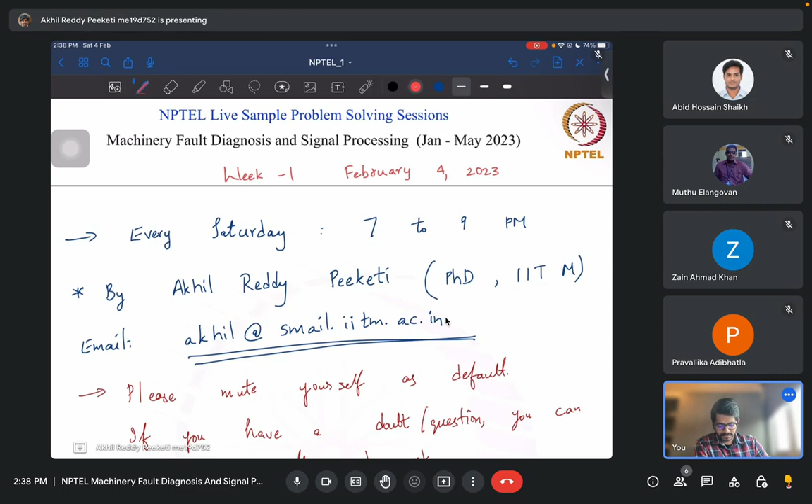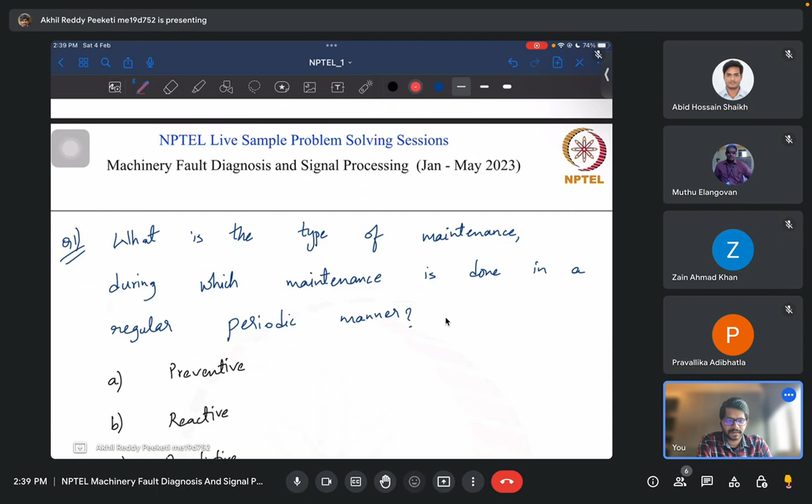Okay. So we'll be doing for the first week sample problems similar to your first week's assignments. These are not exact questions, and we won't be looking at the exact questions from your assignments. You have to solve them on your own. But we'll be looking at similar problems so that this will help you address the questions in your assignments.

So the way I do these sessions is I have these questions ready, some n number of questions, and we will look at each question and try to answer them and figure out the reasons why that is the answer and others are not, so that we can discuss the surrounding topics also. Okay.

So to begin with our first question, what is the type of maintenance during which maintenance is done in a regular periodic manner? Can anyone answer? Yes. Okay. The answer is correct. And why not others? And what kind of maintenance do you do in the other two types, reactive and predictive?

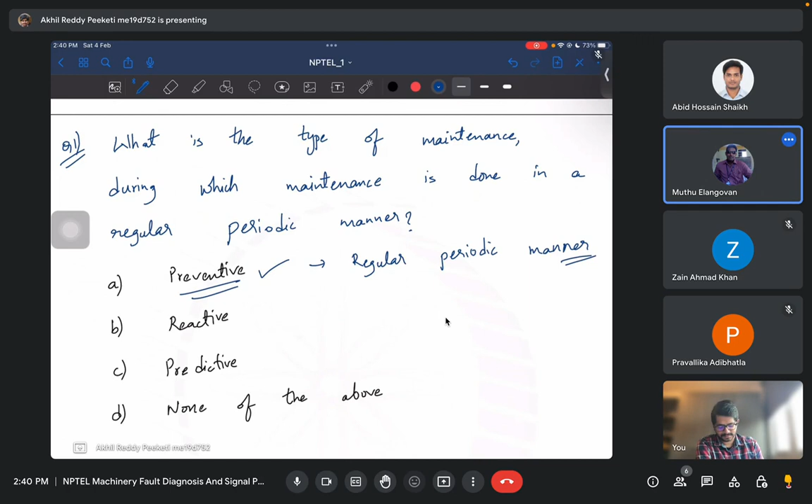Okay. And then the reactive, Muthu, can you speak? Abid, yeah. Muthu, can you? Yes. Do the maintenance. Yes, yeah.

So once a breakdown or failure happens, then we do the maintenance. So that is the reactive maintenance. And in predictive, we monitor the system, and if certain conditions are met, then we do the maintenance, right? Yeah. Okay, that's good.

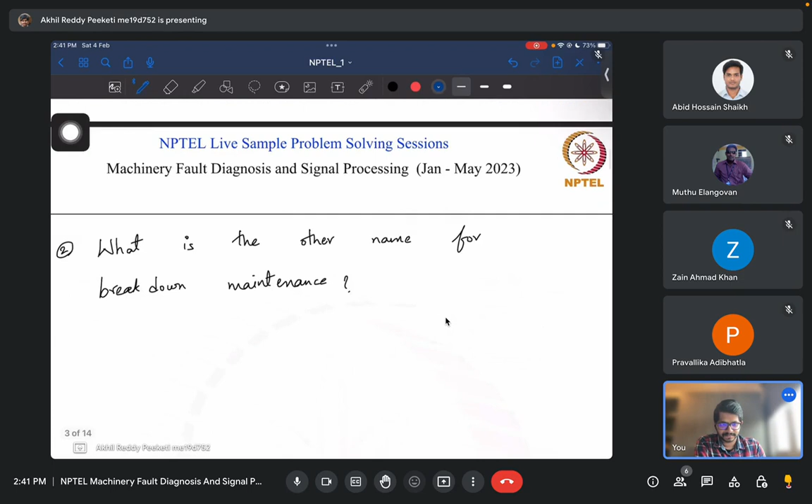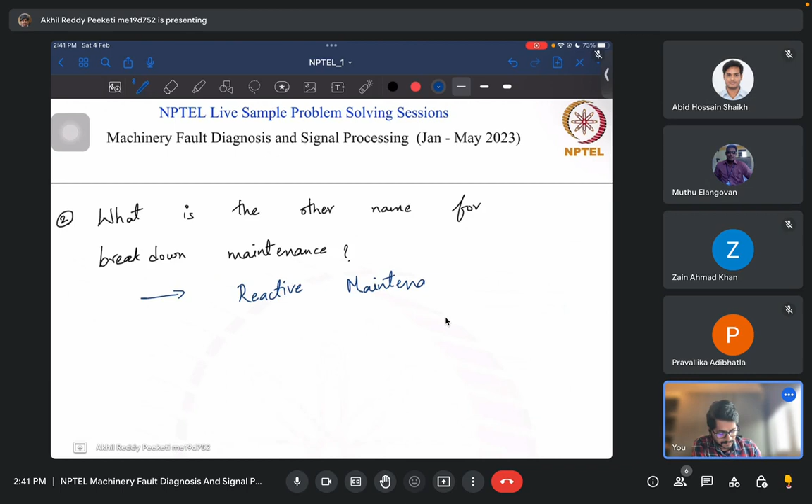So the next question would look similar, or you already know the answer. So what is the other name for the breakdown maintenance? Yes, which we discussed in the last question. Now let's look at predictive maintenance in a little more detail.

So here, as I said in the last question, if certain conditions are met, then we do the maintenance. So how do you see those conditions? What do you think are those conditions, and how do you get to those conditions? So can anyone tell me what are some of the steps or items involved? Yes.

Okay. So basically, we can have some sensors and transducers which will sense, maybe visually, or through hearing because of the vibrations, or through touch, or through accelerometer, or different kinds of techniques, and then we convert those signals, process those signals, perform some more operations on the signals, and then take a call whether we need to do a maintenance or not. So that comes under predictive maintenance.

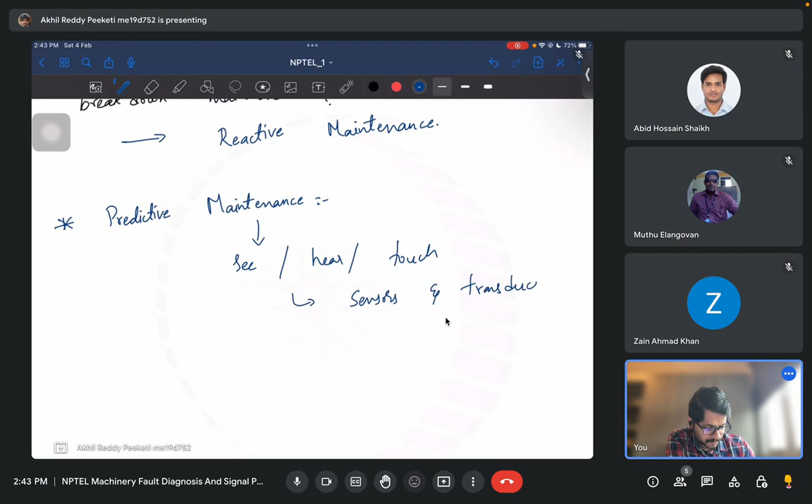So using sensors and transducers, which will generate signals, and processing those signals, and characterization, and then whether to do maintenance or not. Okay.

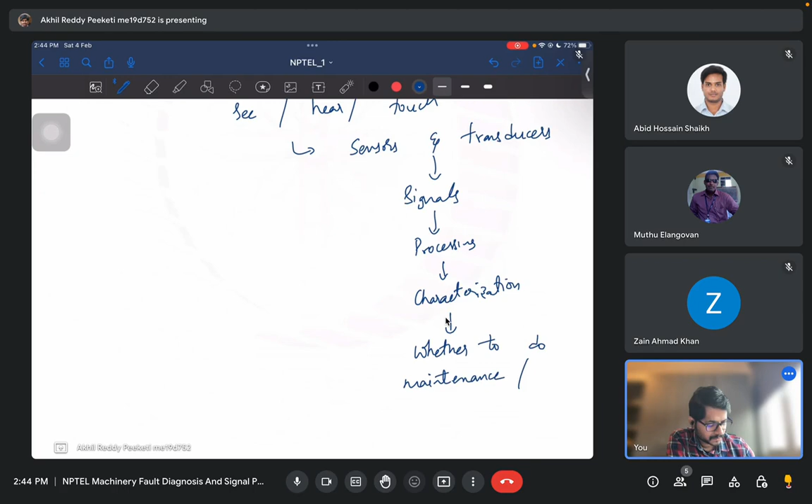So because of this maintenance based on certain conditions, predictive maintenance is also called by one more name. Can anyone give that name? Yes, exactly. So let's move on to the next question. The remaining useful life is predicted using... anyone?

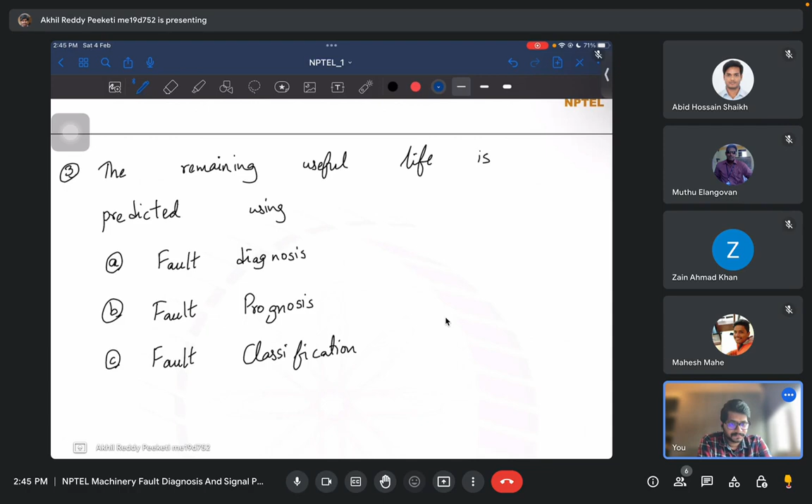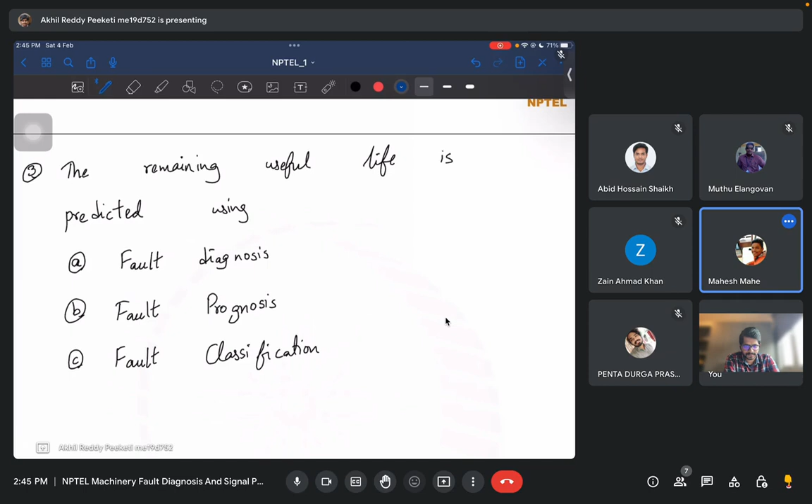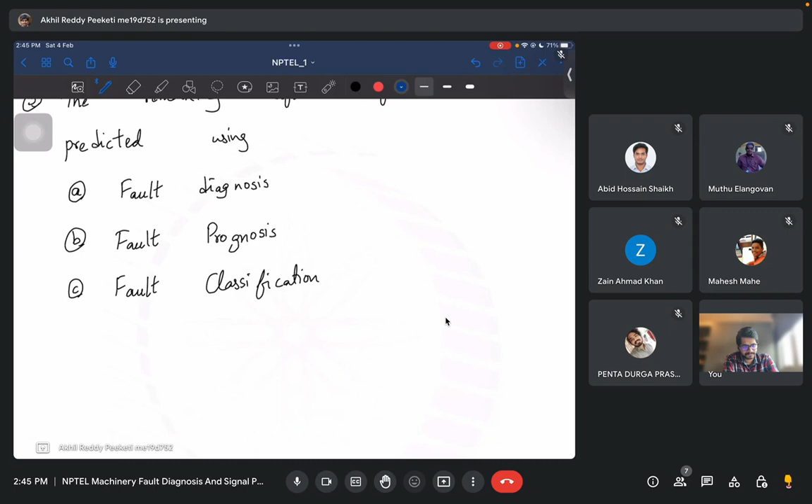Fault diagnosis. Okay. So what exactly do we do in fault diagnosis? Okay. Yes. So first we detect that a fault exists, find where it is, and isolate the fault, right? So only that part is diagnosis.

So if you just identify and isolate the fault, will you be able to predict the remaining useful life? No, you won't be able to. You will know where the fault is, but the next steps, to process that and understand what kind of fault it is and how long the machine can run with that fault, all fall under prognosis. Diagnosis is just identification of the fault, and whatever you do next is part of prognosis.

So based on the type of fault, what are the next steps you need for maintaining or repairing that fault, and after maintenance how long the machine can run. That comes under prognosis. So the remaining useful life is actually predicted using prognosis, not diagnosis. Is that clear, Mahesh?

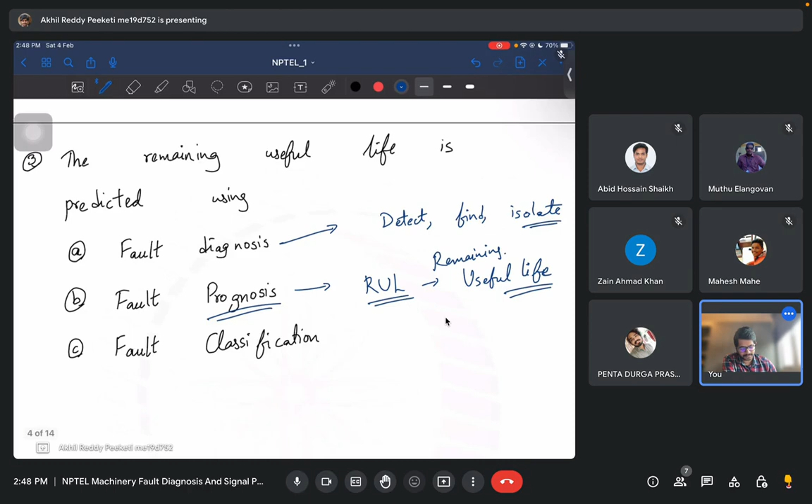Yeah. I just want to ask about prognosis: what do you think are the advantages if you account for fault prognosis and do predictive maintenance? Yes. Yes, yes. So that's the answer. Yeah. So I think we have answered this question.

One more point I want to highlight regarding predictive maintenance: do you think predictive maintenance using these sensors is economic, or is it better to go for reactive maintenance? Which do you think will be better? This question is to all of you.

Yes. In reactive maintenance, every time the fault happens you need to do the repair. But with predictive maintenance, you can predict when the fault happens and take care of it even before it happens and reduce the cost. But because you have sensors and extra setups you don't need in reactive maintenance, predictive maintenance will have high initial costs, right?

Okay, because of the failure, yes, okay, yes, that's good. So, advantages: economic in the long run, and prevention of secondary defects or failures. So this is the main advantage, and because you know what kind of faults may occur, you can also reduce the inventory needed for repairs. Okay. So let's move on to the next question.

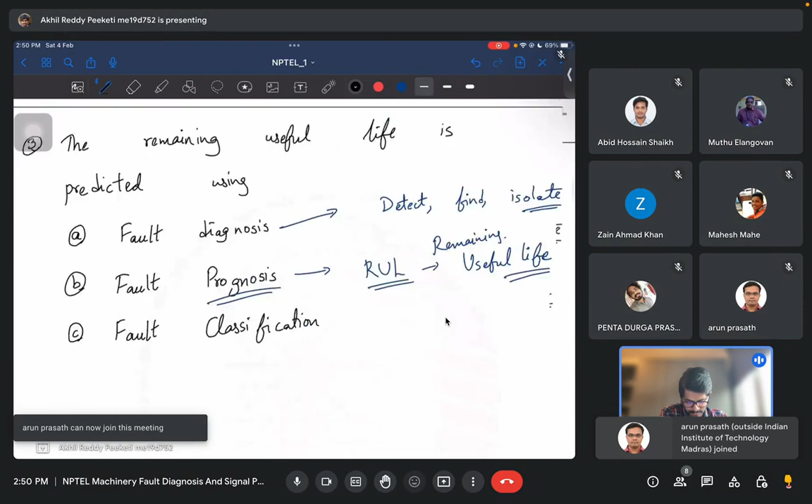So what are the elements of a prognostic health management cycle? We discussed earlier what elements you need in prognostic health management or predictive maintenance. So can anyone answer? Yes, yeah. So we need all of them in the entire prognostic health management cycle.

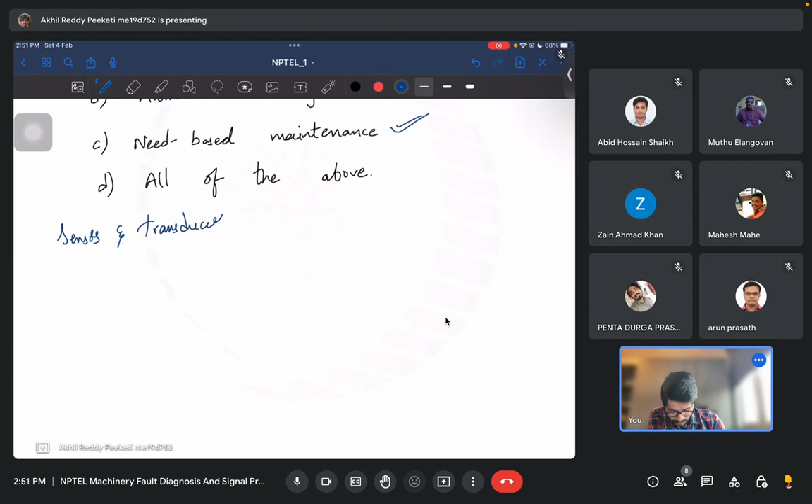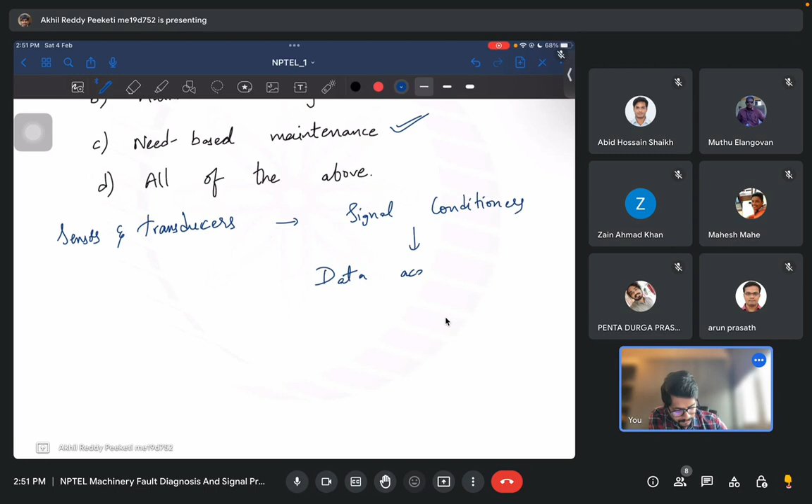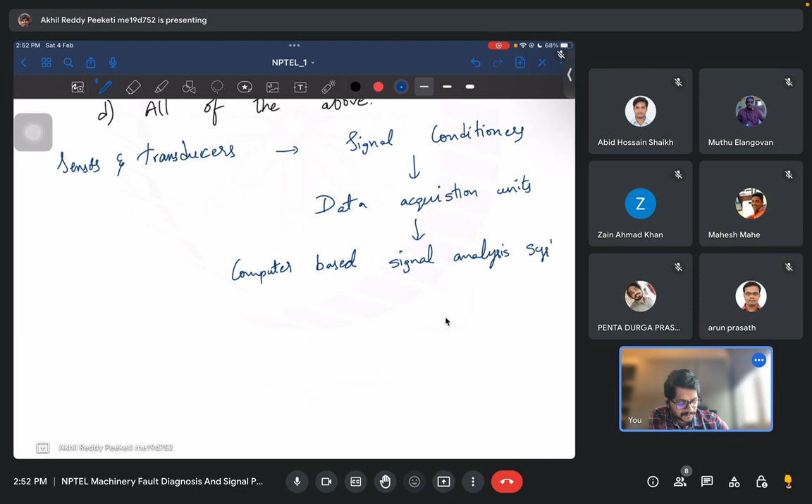As we have seen earlier, first you will have sensors and transducers, then signal conditioners and data acquisition units, and then once you have the data you need to process or analyze it, so you need automated or computer based signal analysis systems, and then software driven diagnostic routines.

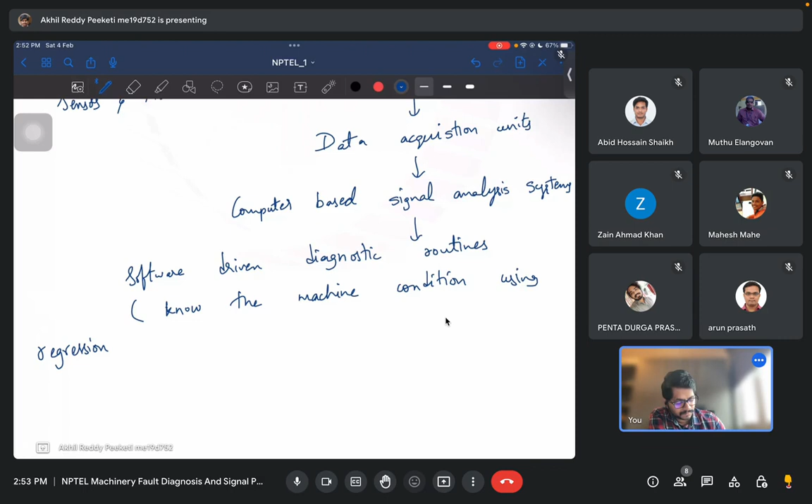To identify characteristics of the signal which tell you whether to do maintenance or not, that happens using regression models, and finally, because you know the machine condition, you can take a call on whether maintenance is necessary or not.

Okay, so all these are the elements in the prognostic health management cycle. Here I have given three options, but these could be interchanged between any of the options. So all of these are elements of the prognostic health management cycle. Let's move on to the next question.

This should be straightforward, I think. What do you call the useful period of a machine? Anyone? Yes, uptime. Also, these sessions are supposed to be interactive, so you can voice your opinions or ask your doubts by unmuting yourself.

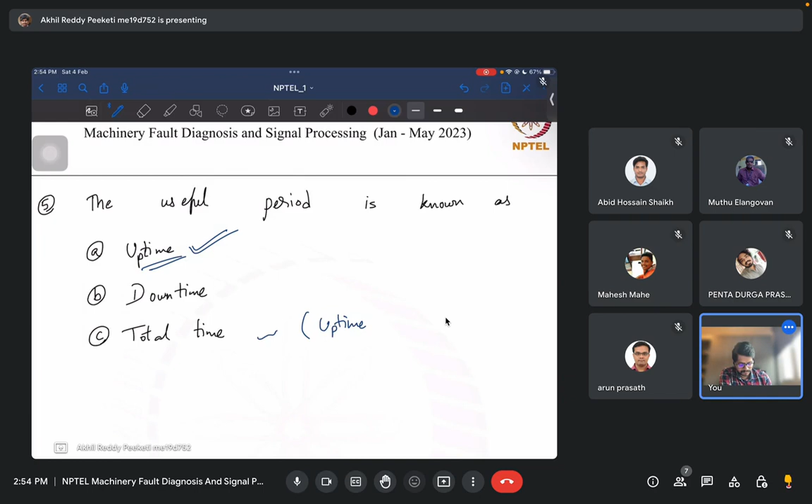So the answer is uptime, the useful period, and downtime is the time when you need to do maintenance and the machine is not running; the total time is the sum of these two. Okay. So the useful period is known as uptime. Next question: did you come across something called availability of a machine? And how do you think we should calculate it?

Yeah. So yeah, here the total time you can take as uptime plus downtime. So this is also the answer. So the answer is A and B.

So availability is the ratio of how much time the machine is available by the total time. So uptime plus downtime, or uptime by total time, or total lifespan of the machine. Okay. So this is how you can calculate the availability of a machine.

Okay. So any doubts till this point? So we have discussed till now what are the types of maintenance: preventive, reactive, and predictive. And then you have seen what are the different types of fault diagnosis and prognosis, what is the difference between them, how do you calculate the remaining useful life, what are the elements of the prognostic health management cycle, and next uptime and availability. Any doubts still here?

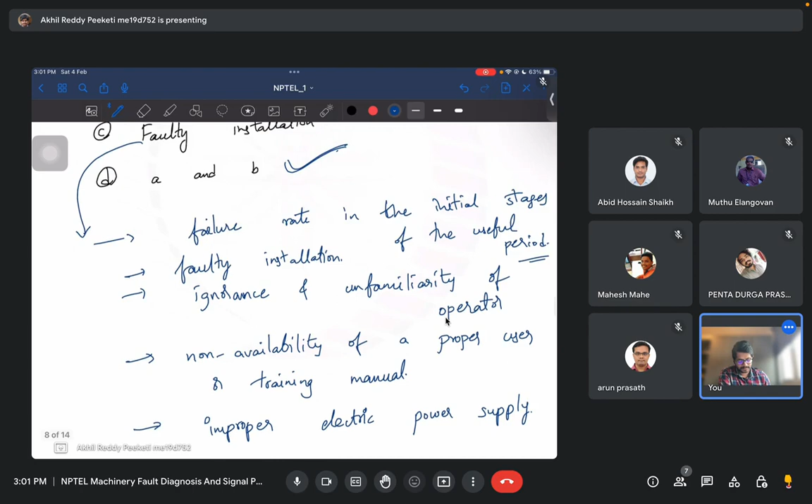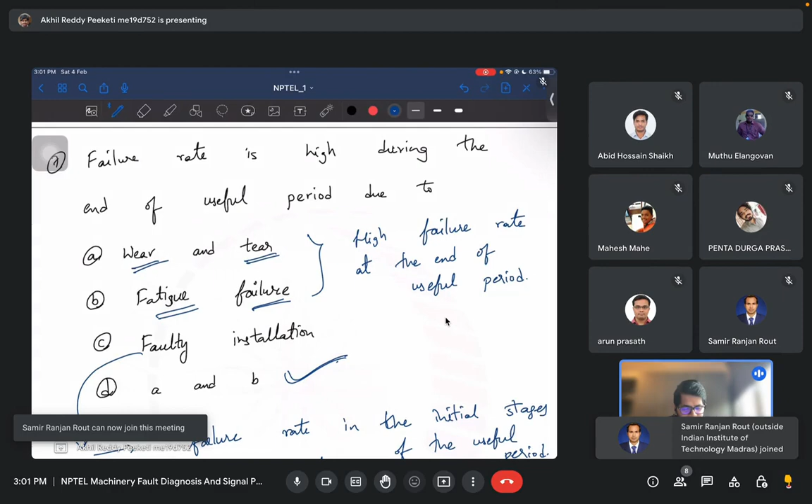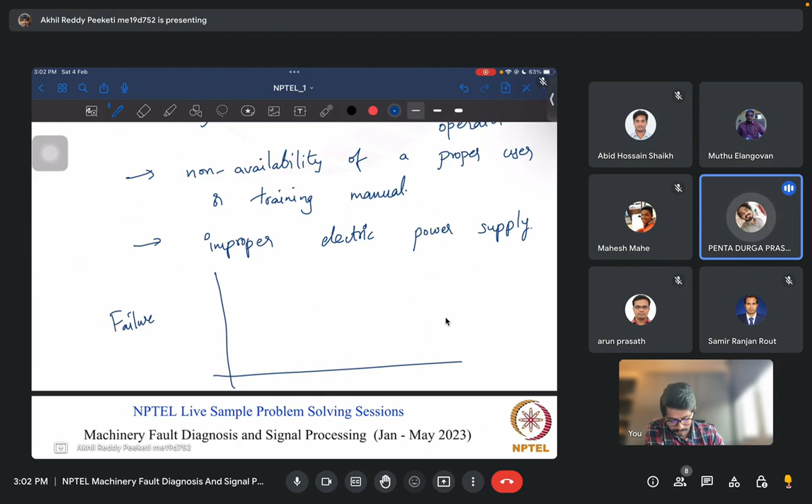So because of this, how do you think the failure rate looks with time? If you plot the failure rate of a given machine as a function of time, how should the curve look? Yeah. So initially there is a high rate of failure because of any of these conditions, and after you fix all those conditions, like Durga suggested, you will have a lower failure rate for some time, and at the end because of wear and tear and fatigue, again you will have high failure rates. So that's why you will get a bathtub type curve.

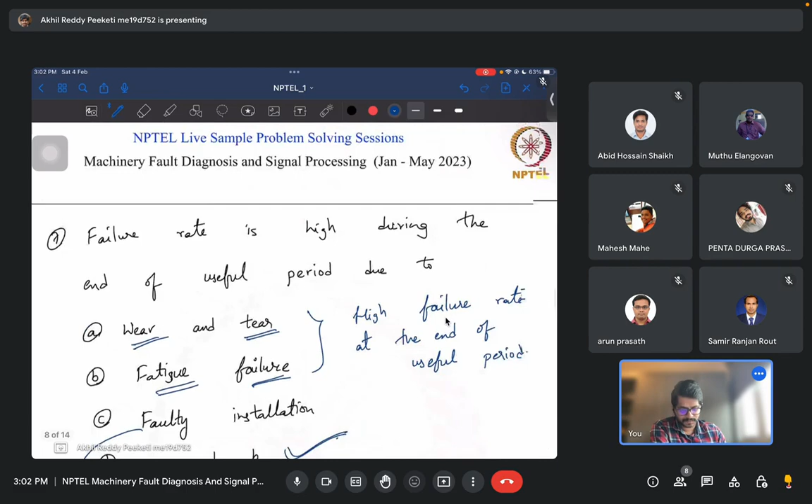Okay, so there is one more point which I forgot during the availability question. Let's say you want to improve the availability of a machine, what do you think you should do? What is the best option to improve the availability? I'm talking about the uptime and downtime, not going into that level of detail at this point. So whether you should increase uptime or decrease downtime or increase downtime... and decrease the downtime, right?

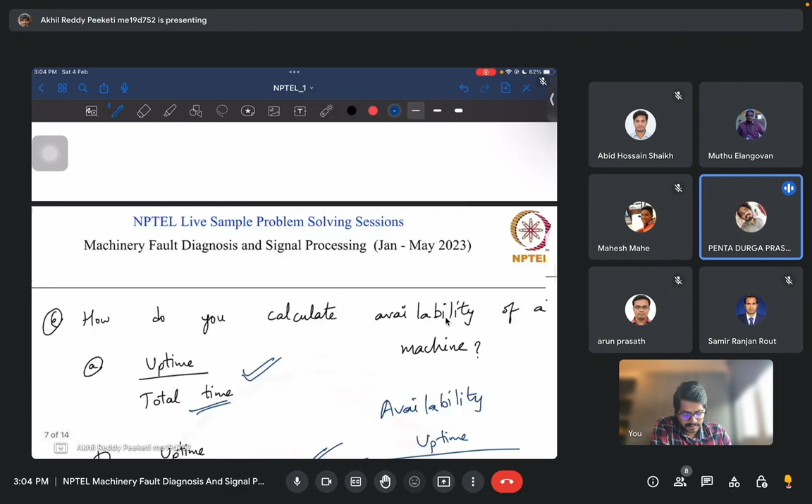Yes. So if you do any predictive maintenance, like the prognostic health management cycle we discussed earlier, you actually decrease the downtime and improve the availability. So this goes back to what we discussed. Yes, condition based monitoring is actually part of predictive maintenance. So doing this, you can improve the availability. That means more productivity of the machine, productivity of the entire factory.

Okay. Productivity, yes. So any doubts still here? Okay. Now let's move on to the next question. Can you please? Yeah. So can anyone tell me what FMECA stands for?

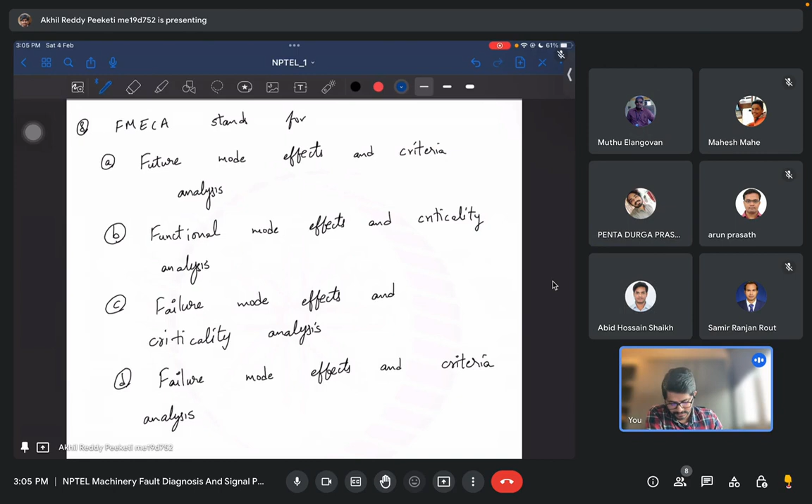Criticality analysis. Yes, that is correct. So that is the full form. It's not future mode effects or functional mode effects. It is failure mode effects and criticality analysis, and not criteria. Basically, what kind of failures are possible, the different types, and how critical or severe they are. So that is what FMECA stands for: failure mode effects and criticality analysis. Okay.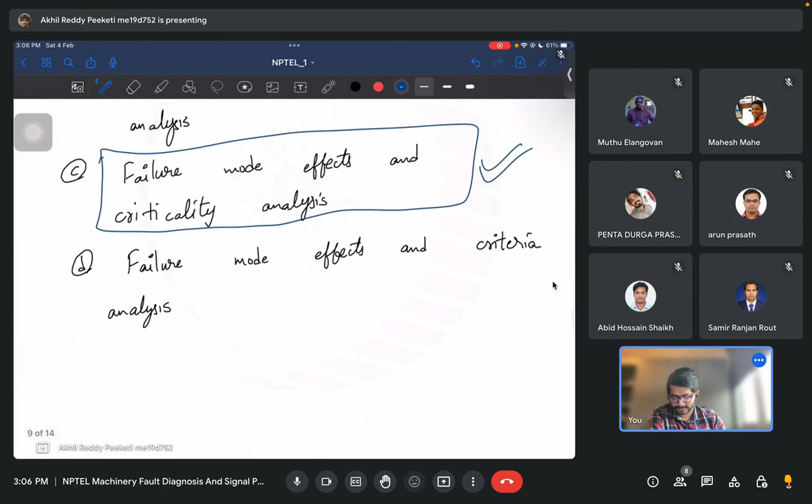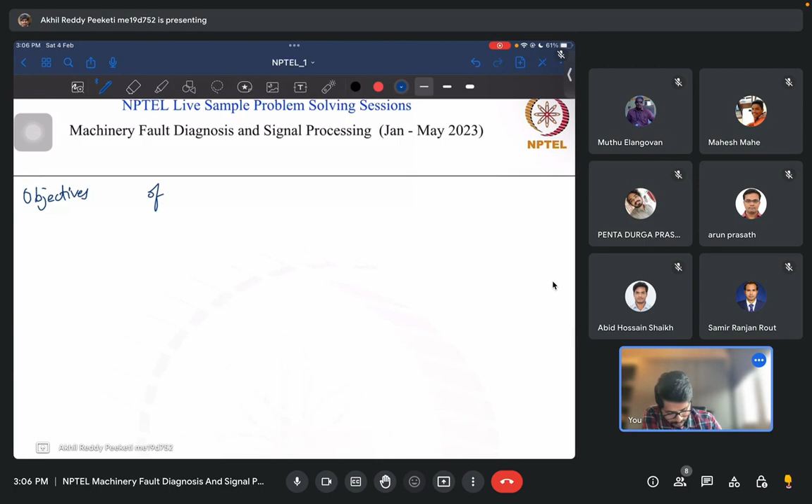So can anyone tell me some of the objectives of FMECA? Okay, so I'll list out some of the objectives. The first thing is to assist in the design of the machine and any alternatives which have better reliability. So assist in the selection of design alternatives with high reliability,

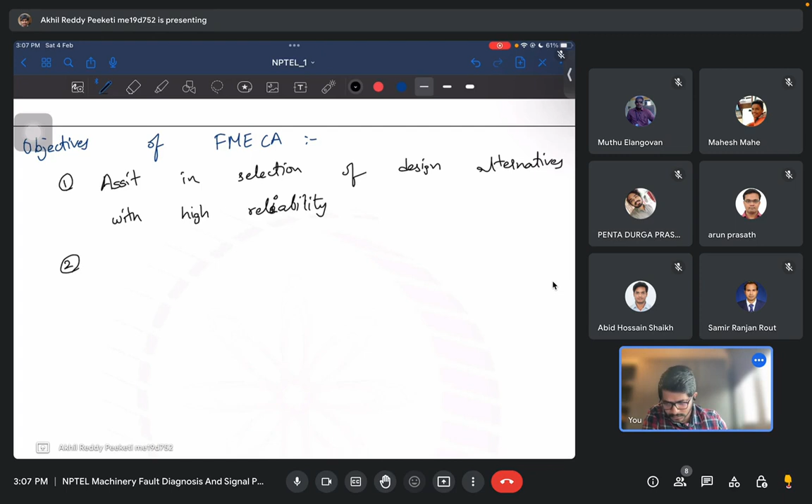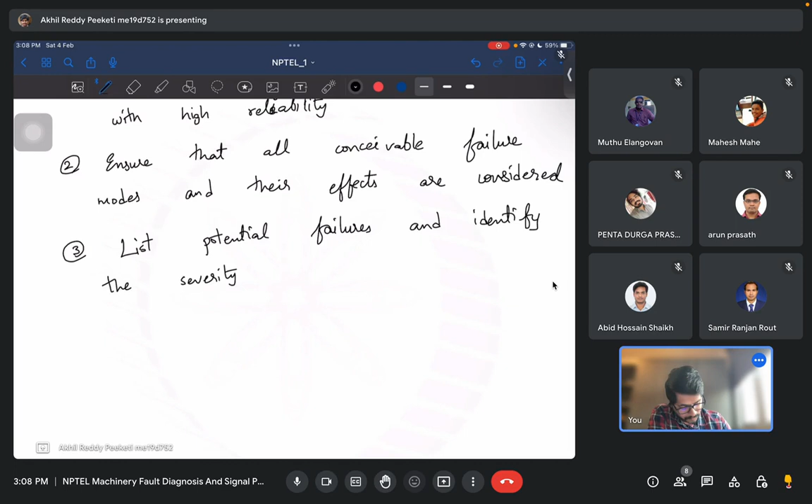and ensure that all conceivable, basically you would have thought about all the possible failures even during the design stage itself, and if such a failure happens, how it will affect the productivity. And list potential failures and identify the severity of their effects.

And criteria for test planning and what kind of test equipment you need. So you know what the possible failure modes are. You thought about all the failure modes. You listed them out and you identified their severities. So when we do this maintenance, even if you know that this is a possible failure, how do you test whether that failure will happen or not? So you need to think about those also.

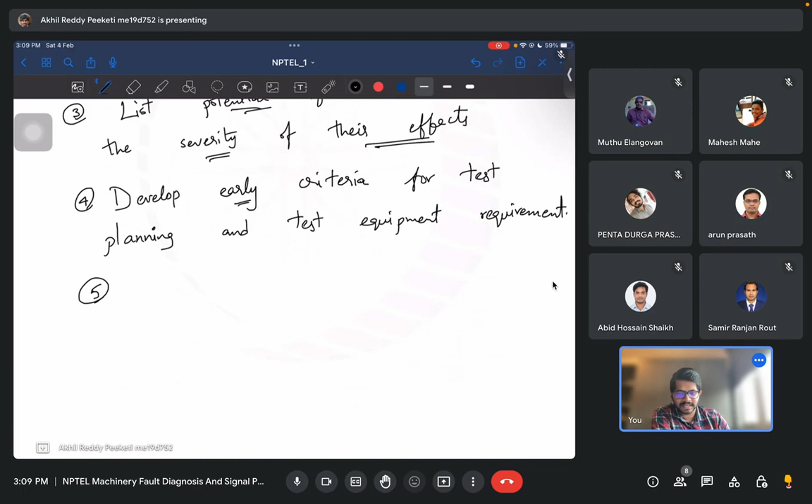So during FMECA itself, we will think about the criteria for test planning. To do several tests and what equipment you need for the same, and to see which stage we are in. Okay, and historical documentation, so that it's easier for the next operators or for future reference.

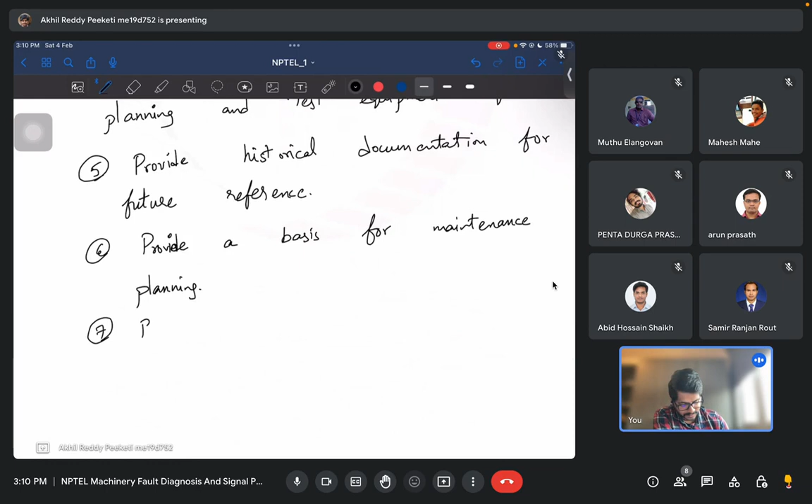Okay, and whatever maintenance we are planning, or for predictive maintenance, this FMECA, if you have done it at the start, gives you a basis to design or plan the maintenance, and it also provides the basis for quantitative reliability and availability analysis. So these are the main objectives for FMECA.

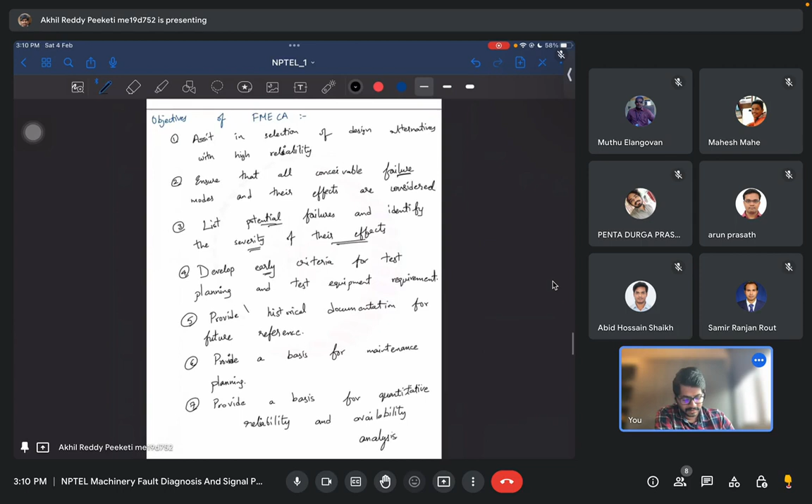So right at the start you find the designs which have a better reliability, and you think about all the potential failure modes and what their effects are, list the potential failures and how severe they will be, and develop the criteria for test planning, how to test for these potential failures, and what equipment you need,

and documentation for future reference, for the next generation or the next part of the team, and for the maintenance which needs to be planned in the factory it provides a starting point, and also to test for reliability and availability in a quantitative manner. Okay, so these are the main objectives of FMECA.

So now, based on the objectives you have seen, you may be able to answer this question. What are the types of FMECA? Can anyone answer this? Why, maybe? Do you think in some of these we don't do FMECA? Yes. So design, process and system, in all of them we can actually do the failure mode effects and criticality analysis.

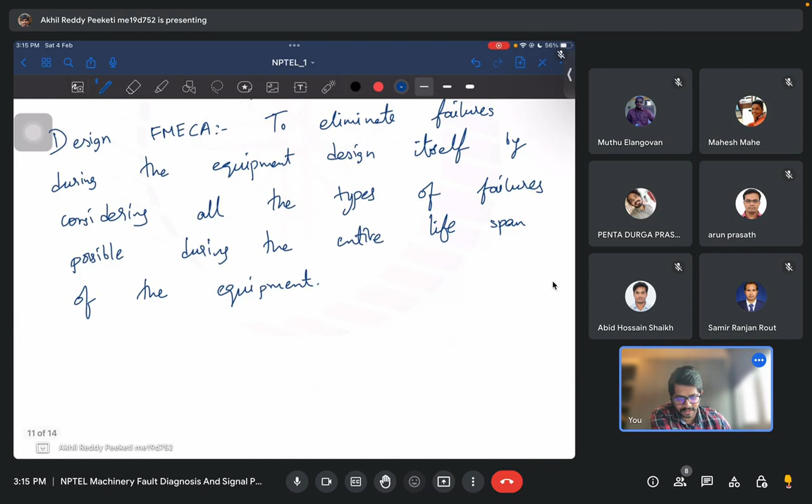So while designing, you look at the entire lifespan of the equipment and think about all the potential failures possible, and how to eliminate them: what design changes or analysis you can do to see which failures are possible and how to eliminate them. Okay, so that is design failure mode effects and criticality analysis. So if you are doing it in process, what will you be looking at during process failure mode effects and criticality analysis?

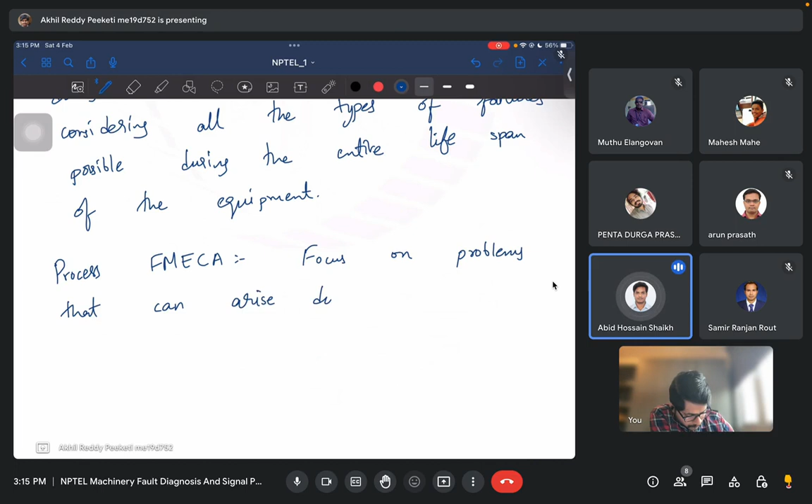So you will actually focus on problems that can arise during... What is CBM? Condition based maintenance. Okay.

So here I am talking about process FMECA. This is due to problems arising during the manufacturing, also manufacturing of the equipment. And as you said, how the equipment is maintained or operated. So these also fall under the process failure mode effects and criticality analysis.

Then the last one, system failure mode effects and criticality analysis. So what do we do in the full system scale failure mode effects? What do we focus on? Hmm? So here, alarm is like once a fault happens, then you may get. So in the system, we look at the big picture. We actually look at the entire production line and what are the possible bottlenecks in the entire production line.

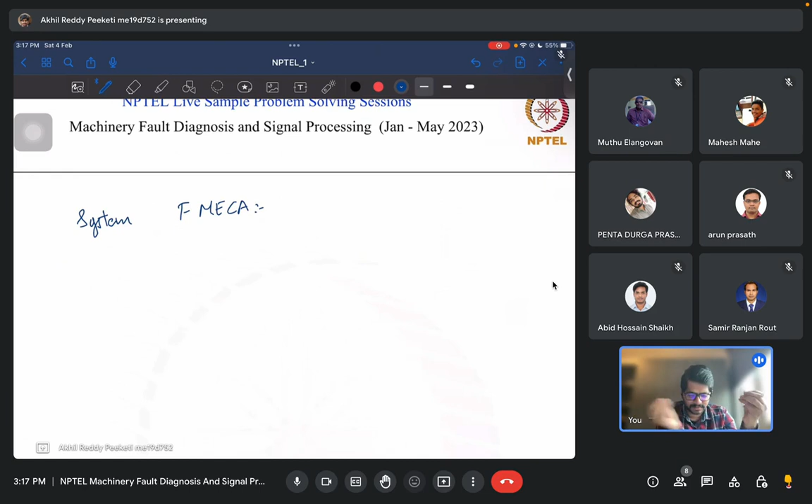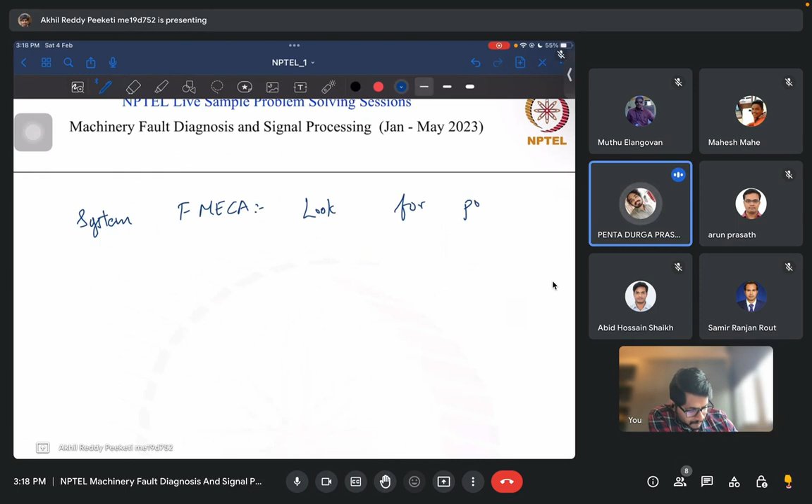Let's say in the entire production line, one machine can handle 10 components at a time, but the fourth machine in the line can handle 20, 30 samples at a time. So because of machine 1 being only able to handle 10, you're actually losing productivity, right? So you actually look at the full system or the full production line and look for potential problems or bottlenecks. Okay. Yeah, yeah.

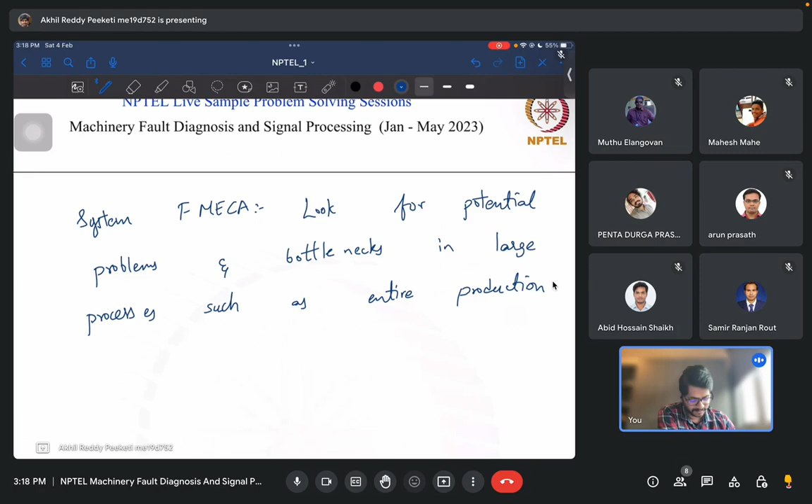You can also look at, let's say machine 1 has failed or has some problem, how that affects the entire production line. So all these things you will look at in the system level failure mode effects. Here you are only looking at a single equipment or single machinery, but in system you are looking at the entire production line with all the machines intact. Okay. So any questions till now? Okay.

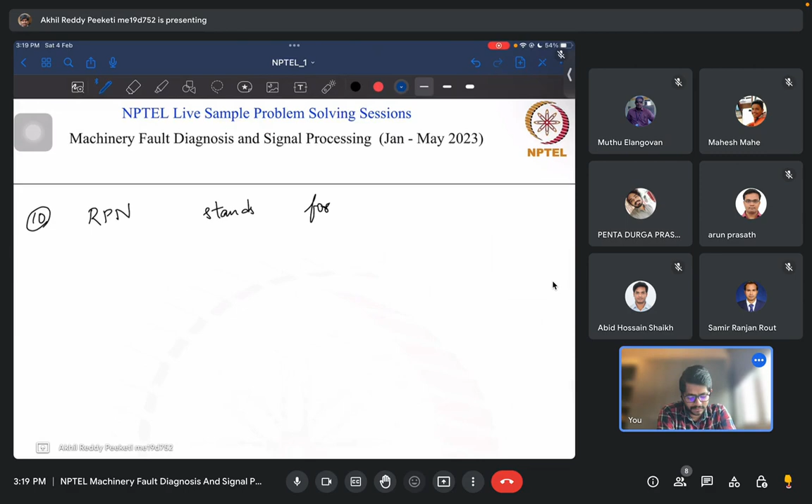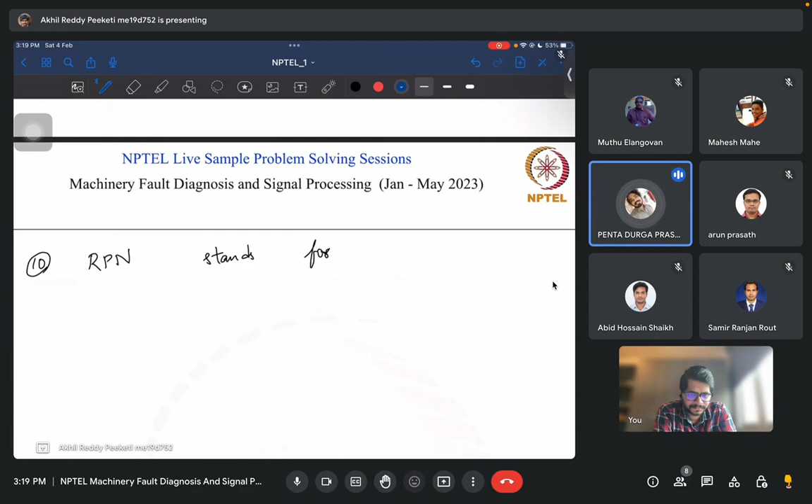So now we go to the next stage. After you do all this failure mode effects criticality analysis, there is some number which you can give to a specific fault or specific condition. That number is called RPN. So can anyone tell what RPN stands for? Yes, correct. So what does risk priority number actually have?

Hmm. Severity is one thing, number of times, so the occurrence is one thing. Yeah. What else you need to consider? Can anyone? Yes, one, yeah. No, no. Can anyone else? Let's give chance to others. Can anyone else tell what would be the third thing which you need to consider in the risk priority number? Yes, there is one more factor.

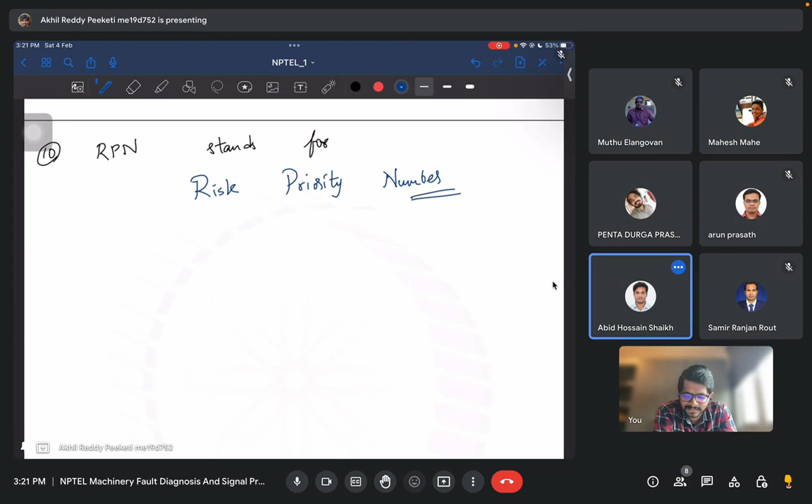Okay, I'll tell. So as Durga and Abid have pointed out, for the risk priority number first you need to consider the occurrences and then severity, and the third one is how easily you can detect it, or how easy it is to not detect the failure. Okay, so even though failure is there, you won't be able to actually detect it.

So if it is very easy not to detect, or if it can easily hide, then its risk priority would be higher for such cases. These would be ranked from 1 to 10, 10 being very high risk and 1 being very low risk. So here 10 means it can occur very frequently, and 10 in severity means it will be very damaging, or it will have very high downtime, or it can cause much higher secondary defects.

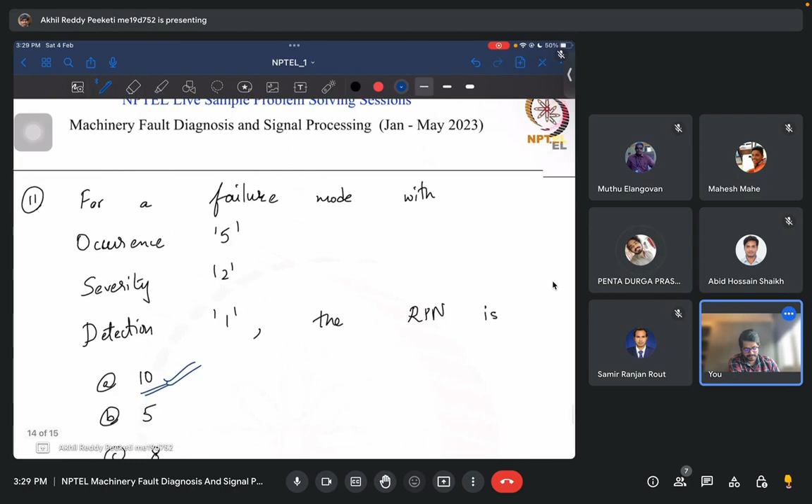So if RPN is very low, that means any or all of these values are very low, then you don't need to worry about it that much. You just act when failure happens. If RPN is very high, that means some of these values are very high, meaning it's very important to minimize that kind of failure. So you do predictive maintenance.

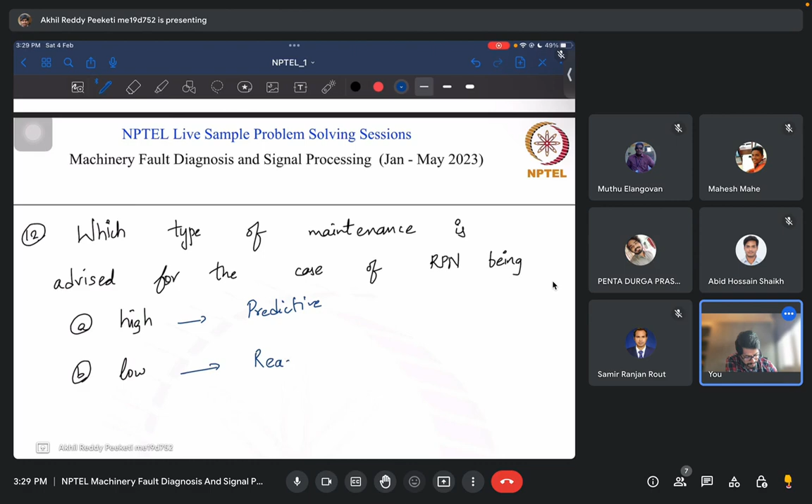So that is the next question actually. Yeah, if it is high, then you do the predictive maintenance, and if the RPN is low, then you do the reactive maintenance. So, any questions till now?

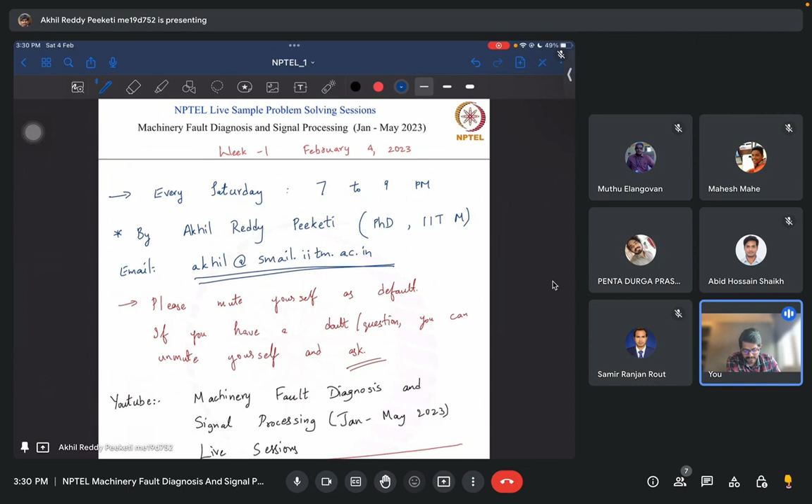So today we have discussed the different types of maintenance and some basic definitions for FMECA, useful time, uptime, and all this. The first question we covered was, what is the type of maintenance during which maintenance is done in a regular periodic manner? If you are doing it in a regular periodic manner, that is preventive maintenance. If you are doing it once a breakdown or a failure happens, then it's reactive maintenance.

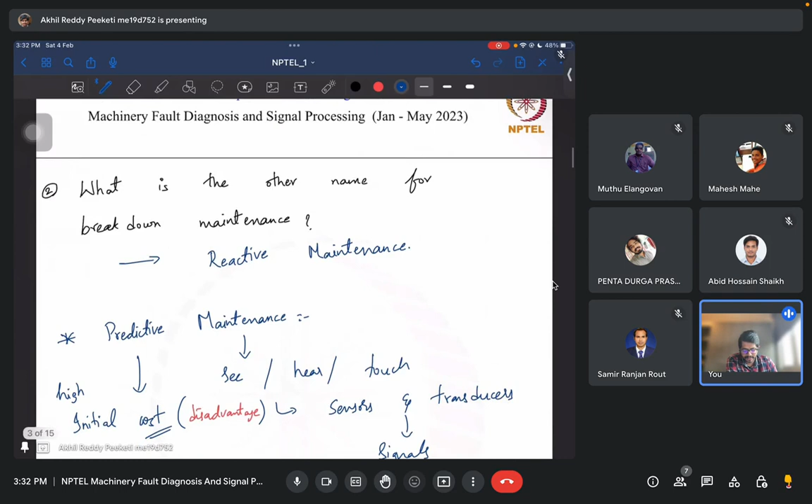Or if you are actually monitoring using sensors and transducers, looking at data for temperature, vibrations, or anything else, and doing maintenance based on certain features of the signals, then that's predictive maintenance. You do predictive maintenance when certain conditions are met, which is why it's also called condition-based maintenance. Reactive maintenance is called so because you do the maintenance once a failure happens or a breakdown of the machine occurs.

Okay, so what is the other name for breakdown maintenance? It's reactive maintenance.

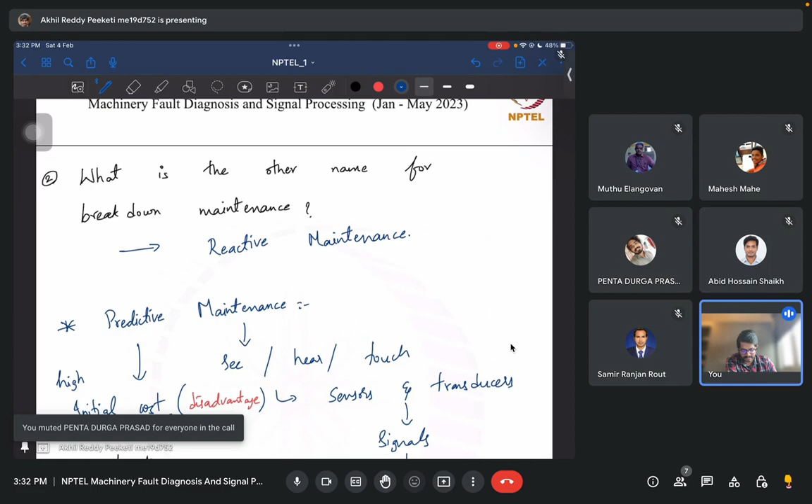During predictive maintenance, we have sensors or some way, even with just your eyes, to see that something is getting hot or feel the temperature rise. Then based on your expertise, you may have to do operations like changing the engine oil, simple things like that. That comes under predictive maintenance, where sensors and transducers generate signals, you process the signals, and based on characterizing these signals you take a call whether to do the maintenance or not.

But the disadvantage with predictive maintenance is you need higher initial cost, because you need to set up extra sensors, signal processing, and data acquisition setups, which creates a higher initial cost.

But what people have realized across the manufacturing industry is that even though initial costs are high, in the long run this is more economic than preventive maintenance, because this way you can maximize how long you can use the machine and increase productivity.

This also helps in preventing secondary failures. Let's say you're in a single production line with multiple machines, and a failure of machine A could lead to a failure in machine B also. If you do predictive maintenance to minimize the chances of failure in machine A, you avoid the failure in machine B as well. That kind of advantage is also there in predictive maintenance, while in reactive maintenance you'll be left with both machines broken.

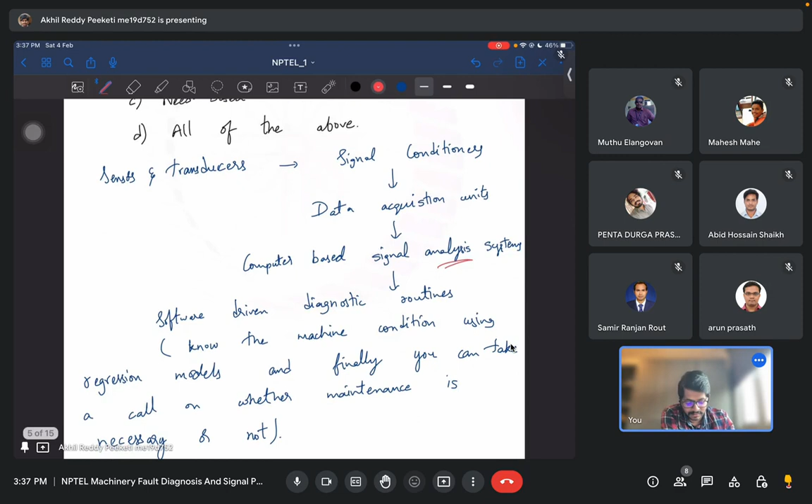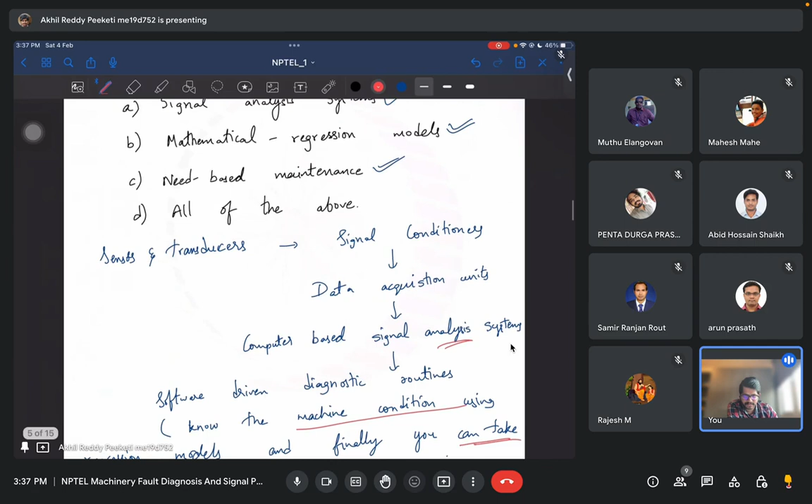Let's say you look at the RMS value, the peaks, or the minimum of some signal, and then predict based on your experience, or based on tests done on different machines — that knowledge or software capability lets you diagnose the signal and know the machine condition, where regression models hold all this prior experience and tests, and based on that you take a call on whether maintenance is necessary or not. So all these are part of the prognostic health management cycle.

So the signal analysis systems, mathematical regression models, and need-based maintenance — all of them are part of it.

So the next question we looked at was, what is the useful period, or what is the other name for it? It's called uptime — how long the machine is actually being used. Downtime is whenever a fault happens and whatever maintenance you're doing while the machine is not running — that is the downtime.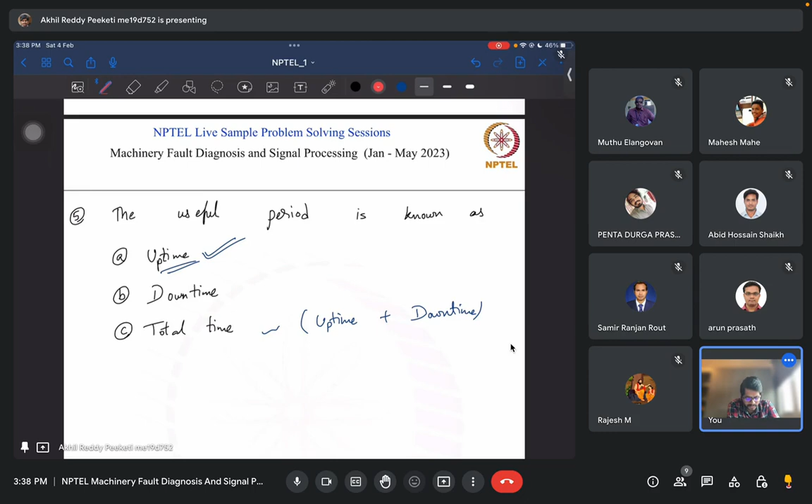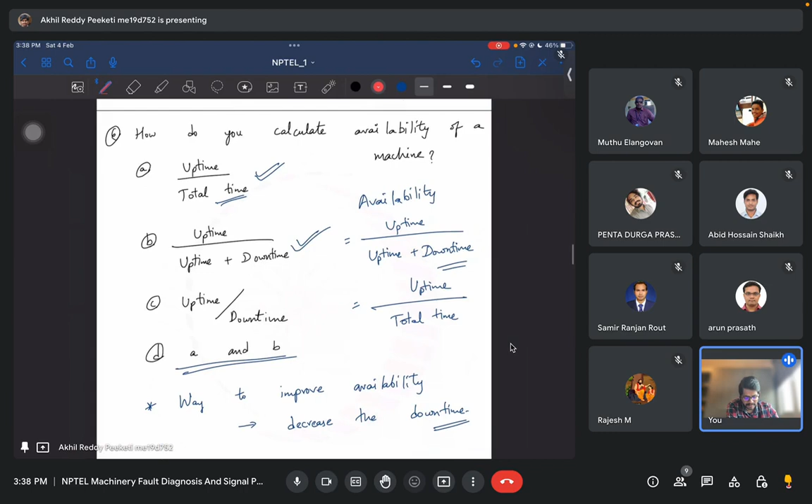And next we looked at how you can calculate the availability of a machine. Availability is the ratio of how much time the machine is available, basically the uptime divided by the total lifespan of the machine. So it's the uptime by uptime plus downtime, or the uptime by total time.

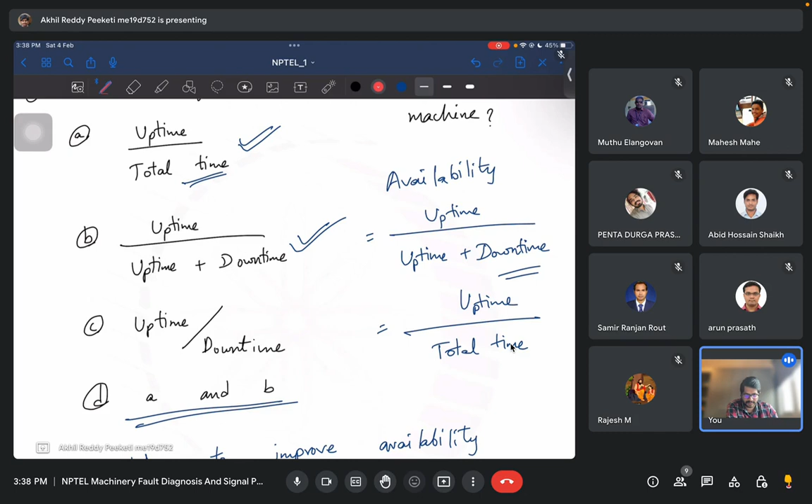So the entire maintenance or prognostic health management cycle, the main objective of all this is to improve the availability of a given machine, which in turn improves the productivity of the entire factory or the machine.

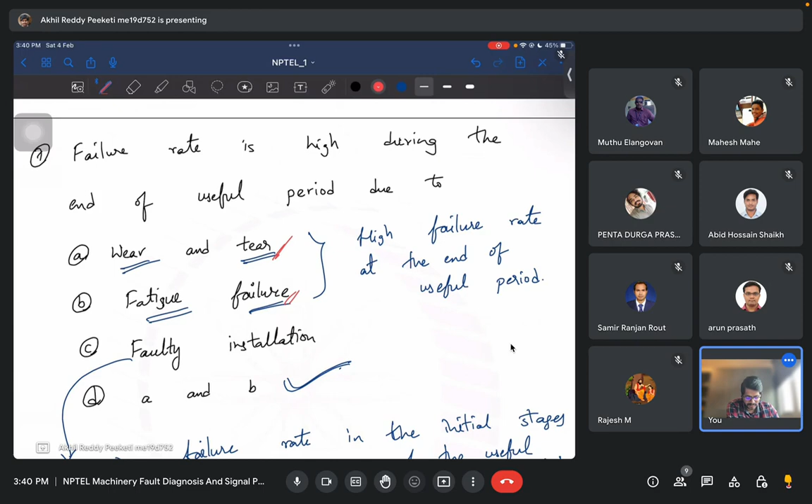Next we looked at how during the entire useful period there is a curve where the failure rate is plotted as a function of time. Initially these failures might be higher, called the infant mortality period, and at the end also the failure rate will be higher because of wear and tear and fatigue failure. So you will have higher failure rates at the end of the useful period, and during the initial time the failure rate is high because the equipment could be installed wrongly.

The installation person may not exactly know all the do's and don'ts for installing that equipment, or he is very new to it, so he doesn't know. And if a proper user or training manual is not available on how to install the machine, that could also lead to higher failure rates in the starting. One more thing is if the proper electric power supply is not stable, power surges in the electric supply could affect the motors, and this could also lead to failure rates in the starting.

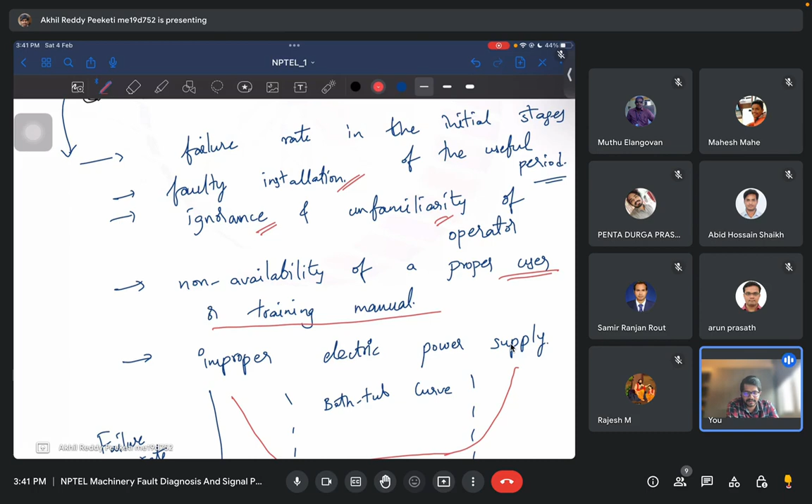So you account for all these failures and improve the conditions, and then you will have the proper useful time where the failure rates are minimum. And at the end again, because of machine fatigue, you will have higher failure rates.

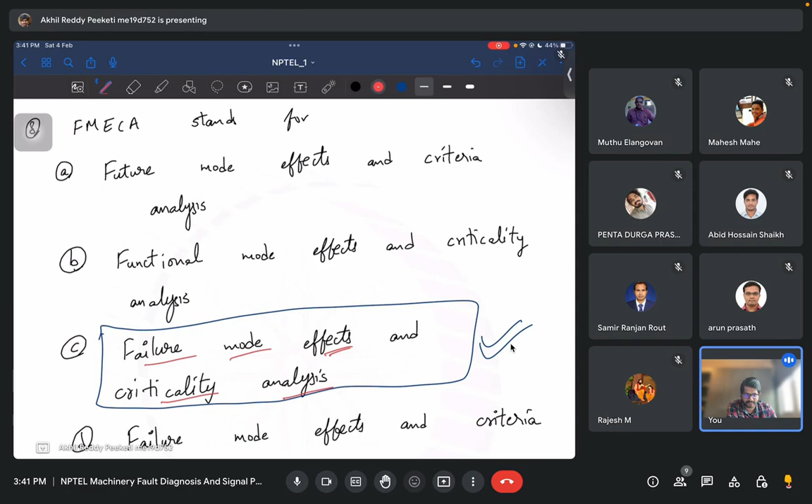Next we looked at failure mode effects and criticality analysis, or FMECA. What are the different types of potential failures possible, how will they affect the system, and how severe they are - that we study and analyze in the failure mode effects and criticality analysis.

So what are the general objectives of this analysis? The first is to assist in selection of design alternatives with high reliability. In the design stage itself, you can have multiple possible design choices to perform a single operation. This analysis lets us choose a design alternative with the highest reliability, and we ensure we have thought about all possible failure modes and how they affect the system and how severe they are.

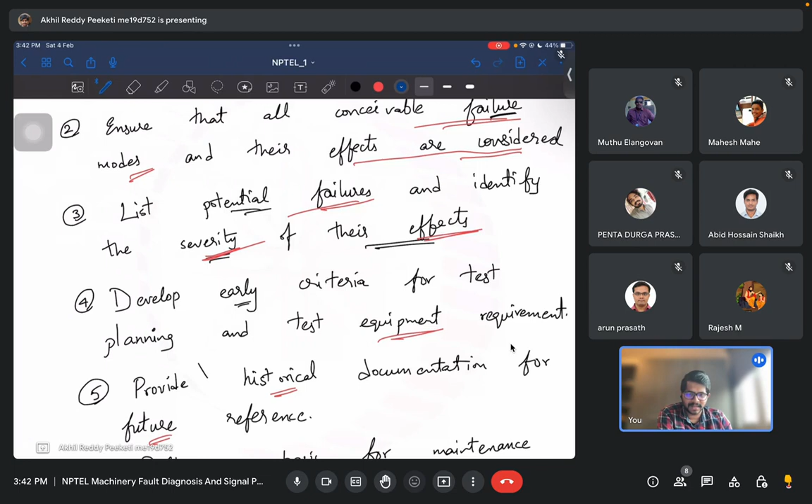And what are the processes you need to test, how do you plan this test, and what equipment you need for doing this testing - you think about all this at this stage itself.

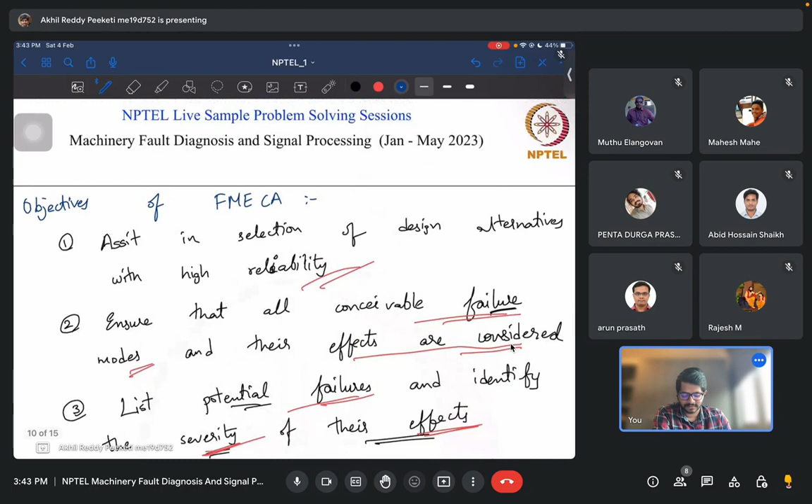Next, you also provide historical documentation from the beginning, the entire documentation of the making or the operation till now, for future reference. And you also provide a basis for maintenance planning and quantification of reliability and availability. These are the main objectives for failure mode effects and criticality analysis.

Next, what are the types of this failure mode effects and criticality analysis? We can do this analysis during the design stage, or during the process stage, or during the system stage. In the design stage, the main objective is to eliminate all failures during the design itself by considering all possible failure modes during the entire lifespan of the equipment. You not only look at the initial stages, you look at the entire lifespan, thinking about the possibilities of wear and tear, everything, and based on that you design. That is the design FMECA.

In the process FMECA, you look at the possible problems arising during manufacturing, or during maintenance, or during operation of the equipment. So while you are maintaining, let's say repairing something, if you are not doing it the way it should be, not using the right tests and tools - these things are looked at during the process FMECA.

And at the system level, you look at potential problems or bottlenecks in a large process such as the entire production line. Let's say there are 10 machines in the entire production line, and you look for potential bottlenecks because of failures in any of these machines, or even without any failure if there are any bottlenecks possible. That is the system level FMECA.

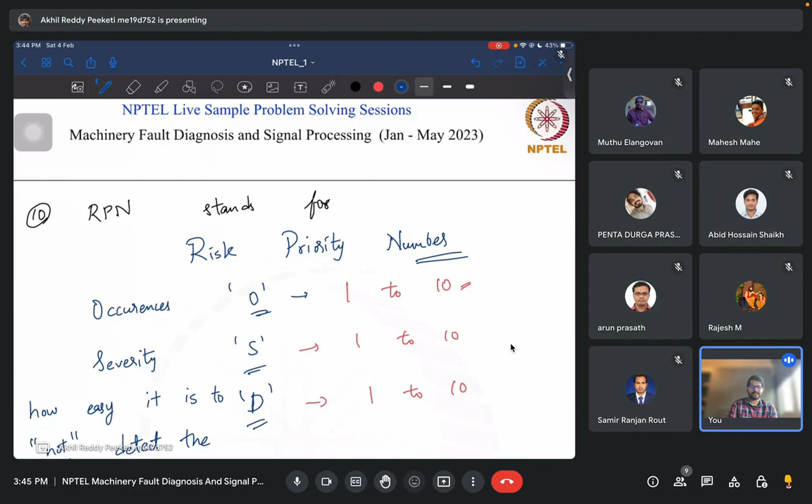Next, we looked at something called risk priority number. So this is a qualitative number which quantifies, or qualitatively magnifies, a failure mode. Okay, so if the risk priority number is very high, that means it's very important to minimize such kind of failure mode. That failure mode is disastrous for the operation.

So for this risk priority number, we mainly consider three things. One is the occurrence: how frequently such a failure mode can occur. And severity: what will be the effect of such a failure mode? So let's say if you have to shut down the plant for the next 10-15 days where you lose the entire productivity, or you just replace it within an hour without any loss in productivity, or you can just continue to use it without any problems. So that kind of severity level is also considered.

Next thing is how easy it is to not detect the failure, so how easily such a failure can hide in the system. That is also considered in this risk priority number, and it's just the product of these three. For each of them, a qualitative number is given based on the severity, and that number ranges between 1 to 10. So this RPN could actually be anywhere between 1 and 1000, 1 being very low and 1000 being the highest possible value.

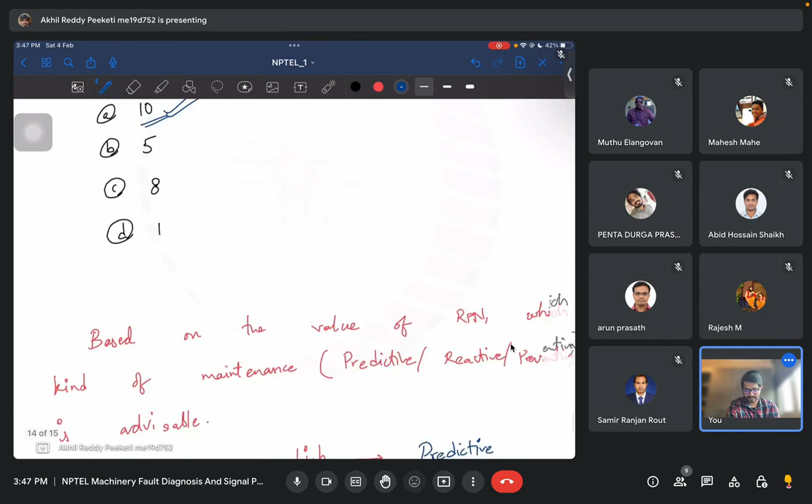And with this risk priority number, you can actually decide on what kind of maintenance is advisable. If this risk priority number is very high, that means it's a very severe kind of failure and it will affect the entire production line. So it's better to avoid such kind of failure, so you need to do predictive maintenance. And if the risk priority number is very low, it doesn't matter, it is not that severe, so you can just do reactive maintenance. And you can calculate the RPN by just multiplying the occurrence, severity, and detection ranks.